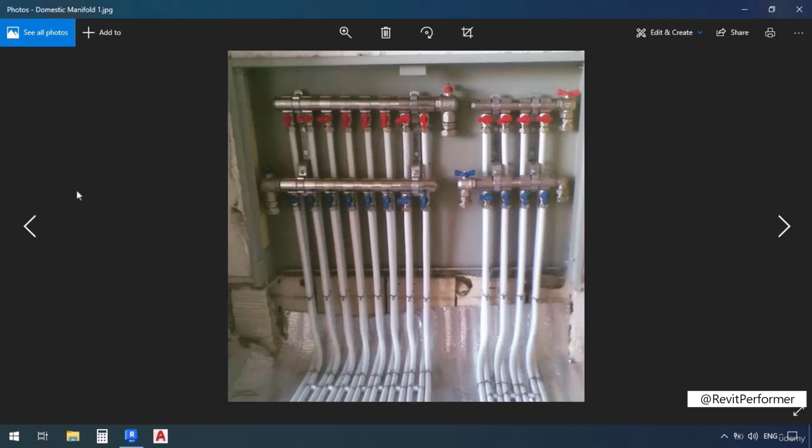We also have another system of domestic pipes, including the cold water and the hot water. Starting from the powerhouse where the cold or hot water is produced, that water goes up and leads to the collectors, and then they will be divided into branches, as many consumers as there are.

Generally, this type of collector is totally different than the collector we saw in the office project. The water comes in from the powerhouse, and then it enters the branches to feed the consumers.

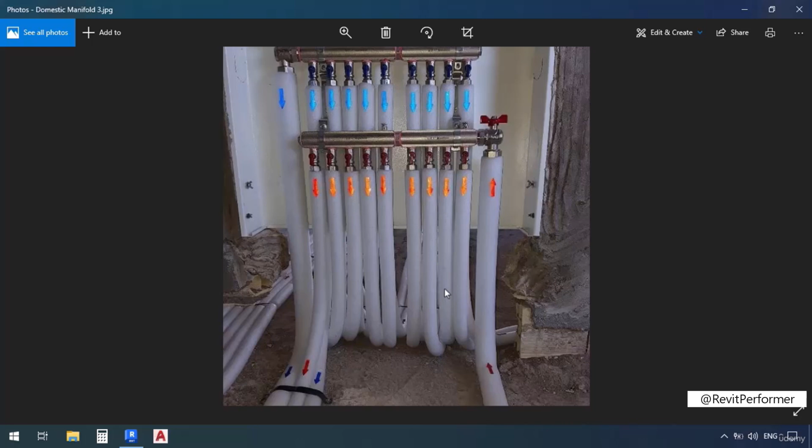Let's also take a look at this picture, another type of collector. This pipe is getting the water from the powerhouse, and each of these branches is for feeding the consumers. Also in this picture, we have another collector, and here too, we have a collector installed on the wall. This is the box holding all of this together, and what's connected to it are insulated pipes.

So now we're going to try to place a collector like this one so we can see how it works. I'm going to go over to Revit, and the project we have at hand here is for a school space, specifically for the lavatory of that school.

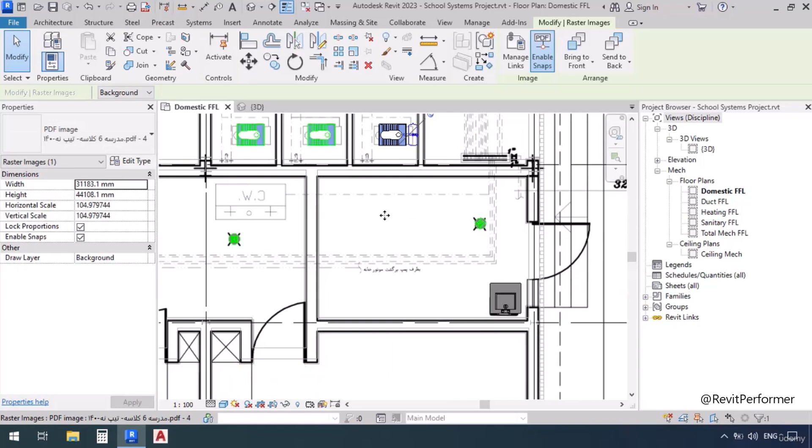First, I'm going to zoom in so you can see. This lower area is the powerhouse. From this powerhouse, two pipes go out, one for hot water and the other for cold water, and they both go to collectors. For each consumer in the area, there's an individual branch onto each of these collectors.

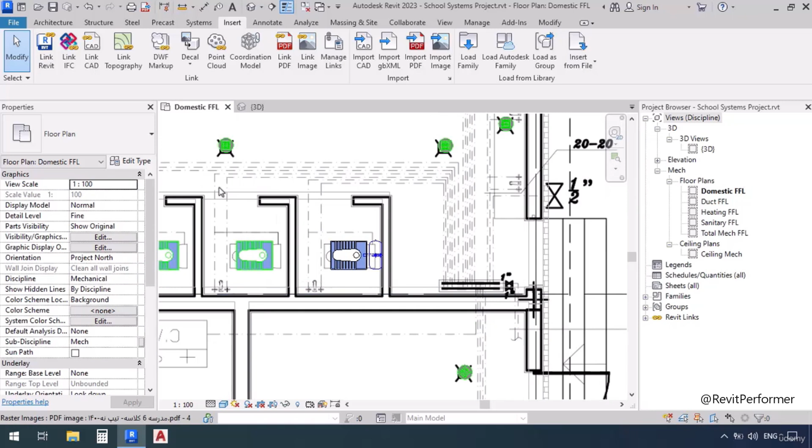For example, starting from the end of the line, this pipe is for the cold water, which goes all the way to the collector. For this other line, this pipe is coming from the collector, as well as some other lines, and we have the same thing going on here too. There's one lavatory, another, and this one, and each of these wash basins have pipes coming from the collectors.

So this is what we are trying to draw now. In order to have the best collector for this project, I'm going to go over to the BIM Object website. After that, I'm going to go to the Insert tab, then click Load Family.

Then I'm going to go to Desktop and open the manifold folder, select both of these families, and open them. Now I have to wait for them to load into my project. It also says they are being upgraded from version 2015 to 2023.

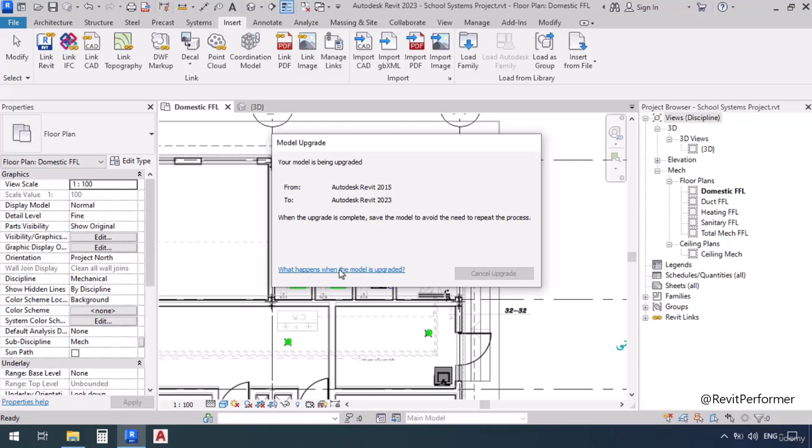Now to place them, I'm going to go over to the Systems tab, then click on Plumbing Fixture. Here I can see the last thing I've inserted and loaded, and if I click to expand it, I can see 4 different fitting types.

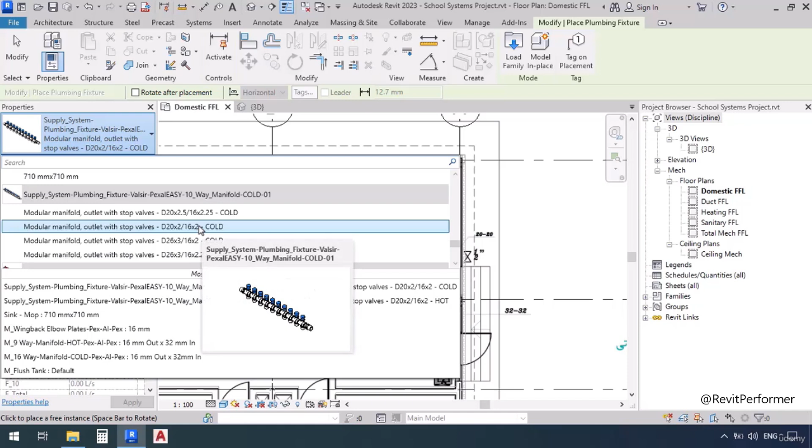The diameters of all their endpoints are 16, but as you can see, one of them says 2.25 and the other says 2, so it seems like these two differ in thickness. As for the other end, we have 20 and 26.

Now, if we go take a look at the plan, we can see that the starting end should be 1 inch, and each endpoint is 16. 1 inch means 25, so we're going to use one of these 26s, especially the one that says 16 by 2, so we'll select that one.

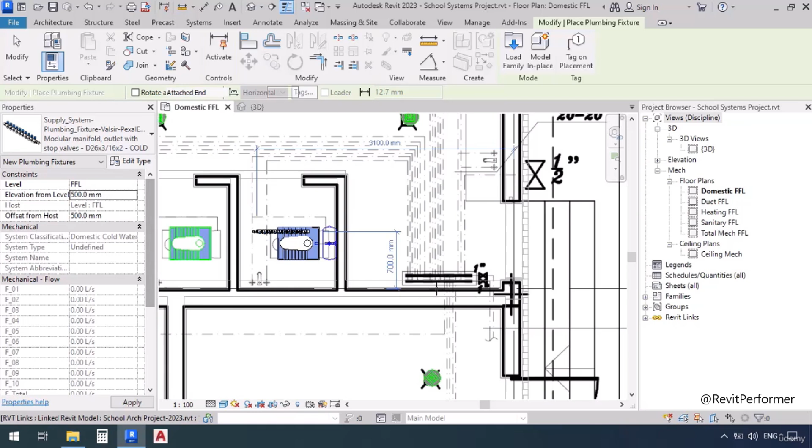Now, before I place this item, I have to give it a middle elevation. I'm going to try to place this cold water collector at elevation 500 millimeters from the level, or 50 centimeters. Now I'll hit the space bar once, twice to rotate my item and put the starting end on the right side.

Now before I click to place it, do you remember how the collectors looked in that picture? As you can see, they're on the wall in a protective box. So that means I'm going to have to place this collector in the wall. Click.

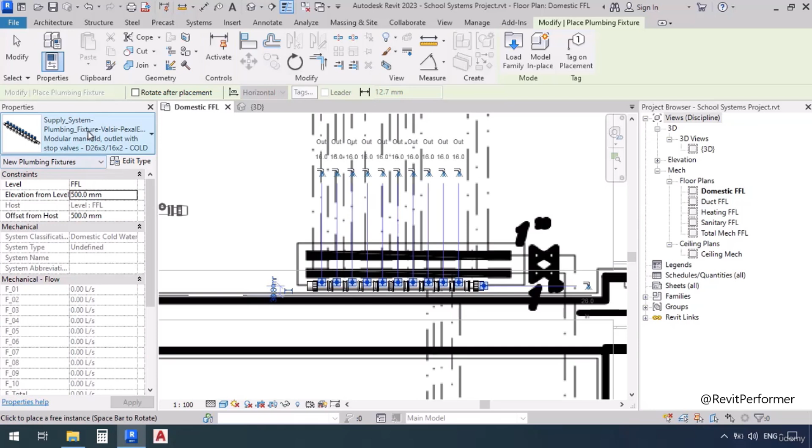Now to place the hot water collector, I have to go here and select it, the 10-way hot water one that's similar to the cold water. I'm going to select it and place this one at a lower elevation, so instead of 500, I'm going to put in 400, or 40 centimeters. Now I'm going to hit the space bar to rotate it, and make sure to maintain a distance between this one and the cold water collector. Then I'm going to click to place it.

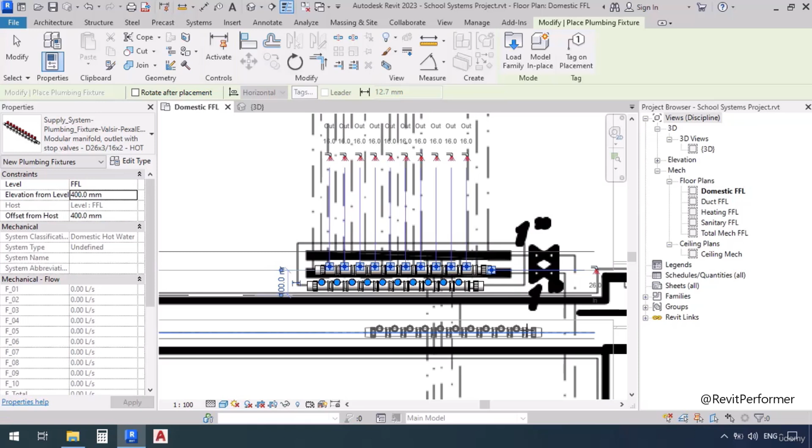Now let's draw pipes for them. First, I'm going to click on the collector to select it. Do you see this connector icon? We're going to click on it, then go over to the pipe types and select Pex-Al-Pex. Also, let's change the diameter to 16.

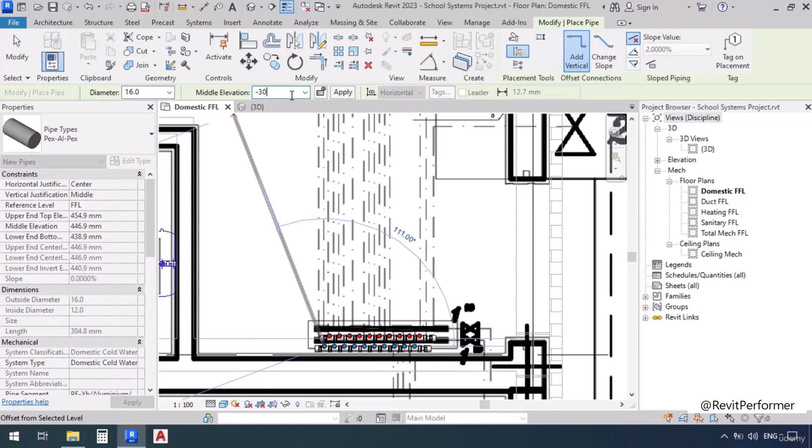For the middle elevation, since we're going to be placing these pipes in the ground, we need a negative elevation from the FFL, so for example I'm going to give it -30 millimeters below the FFL. Now I'm going to move forward and click, then go to the left and click again, then a little bit further, click, and click again at this mixer, then press escape.

Then I'm going to add a branch over here, click, click, and this pipe would be leading to the flush tank.

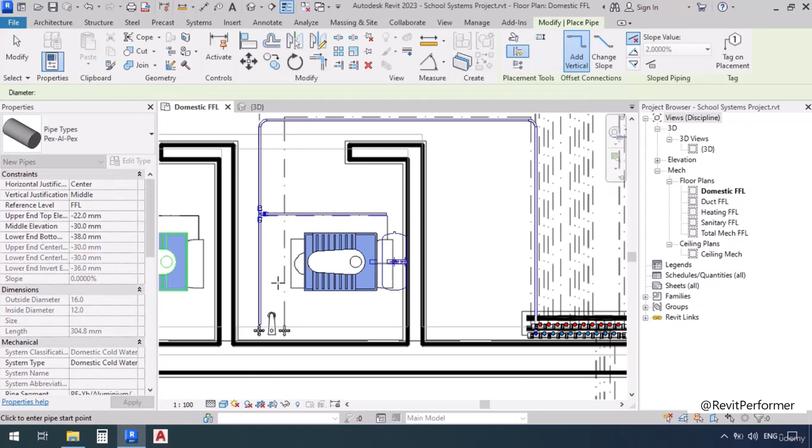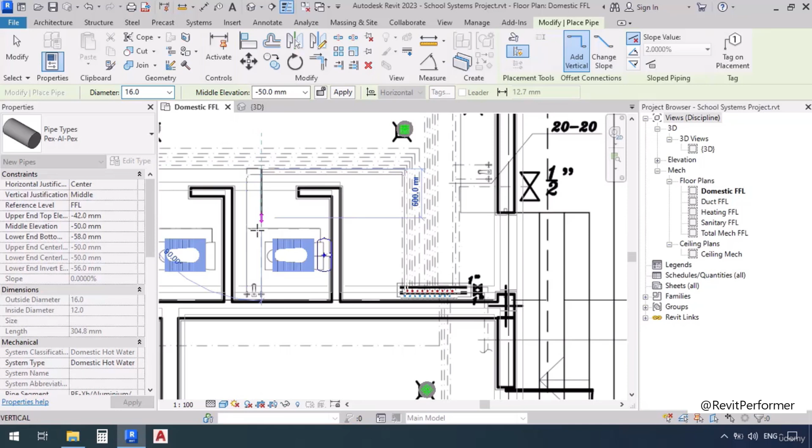This time I'm going to work with the hot water collector, and once again click on this create pipe icon, and this time change the elevations. In the previous one I drew at -30, so let's make this one -50. Then I'm going to click, move to the left and click again, and finally come down here to the mixer, click, then press escape.

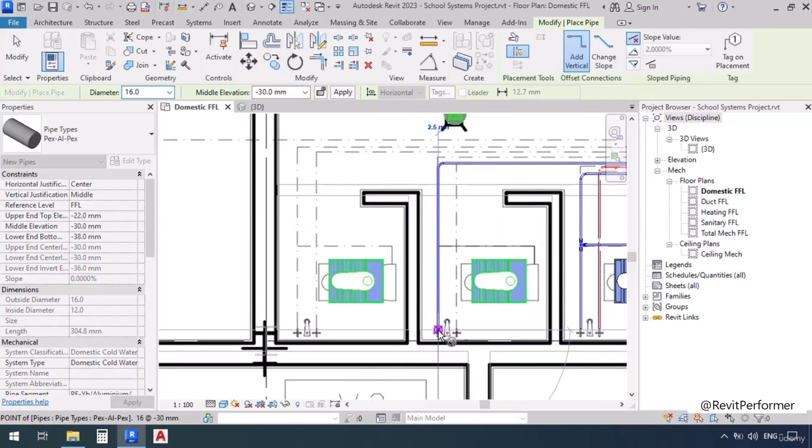Now let's go on to the next stall. I'm going to start from the cold water collector, click on create pipe, and don't forget the elevation -30 again. Then I'm going to go up here, make a click, move to the left, click again, and click down here. Now press escape, draw this branch for the flush tank, then press escape again.

This time let's go to the hot water, click on the collector, then hit create pipe. Then for the middle elevation I'm going to type in -50. Starting from here, I'm going to go up and click, then move to the left and make the second click here, then go down to the mixer, click, then press escape.

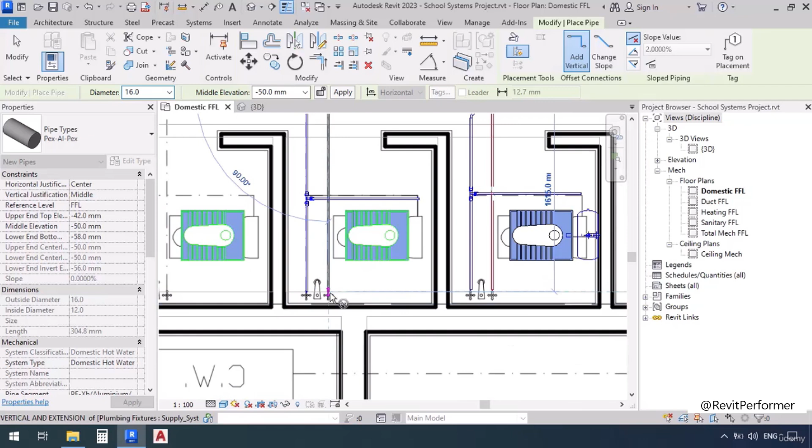So we're going to have to draw these pipes for each stall in order. What about the pipes on the opposite side? We're going to do the same thing for them as well. For example, select the collector, hit create pipe, make the middle elevation -30, and this time draw this way, go down and click, then continue towards the consumer that needs it. We would have to draw the hot water pipes the same way.

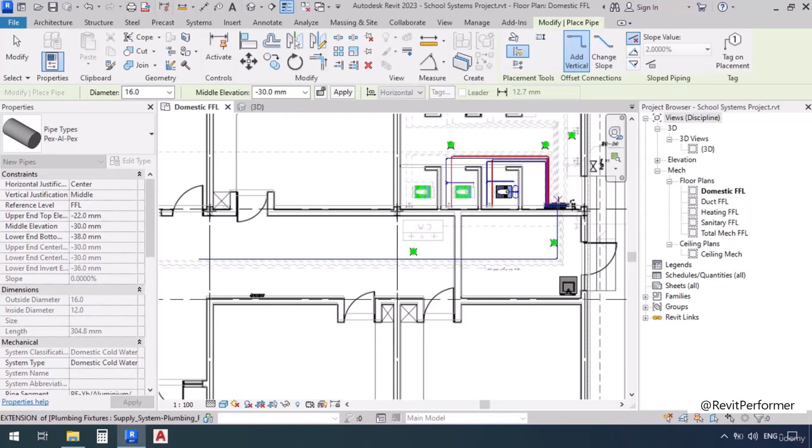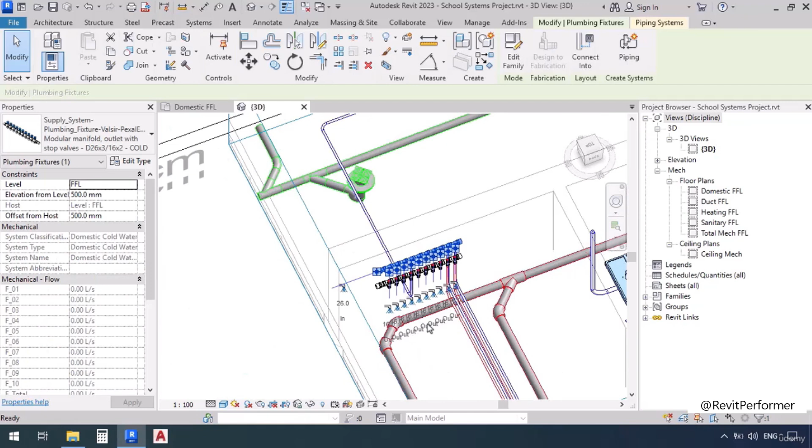But for now, I'm going to hit the tab key 1, 2, 3, 4 times, then click, hold the control key, go on the hot water pipes, hit the tab key 1, 2, 3 times, and click. Then click on selection box so we can take a look at them in 3D. Here we have the hot and cold water pipes. I'm going to rotate it so we can see from the front too.

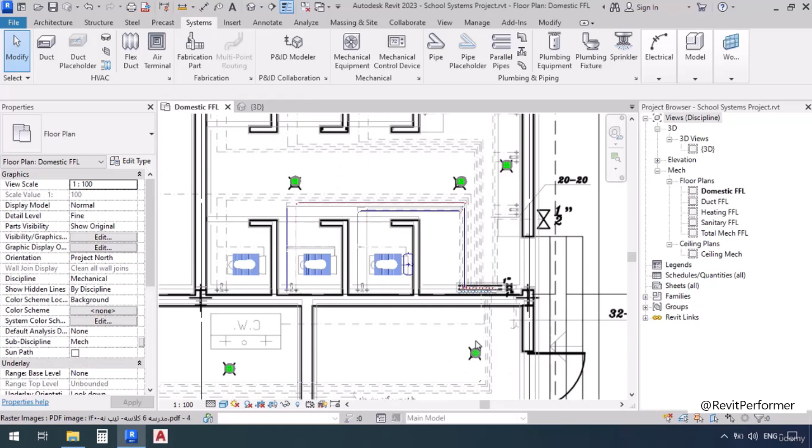Also, to draw the pipes that are coming from the powerhouse, first I'm going to click on the cold water collector, then hit create pipe, and draw a pipe a little bit further. Now I'm going to have to make it go in the ground at elevation -30, then draw a little bit further. Actually, I'm going to have to draw more so that there's enough space for an elbow. There we go.

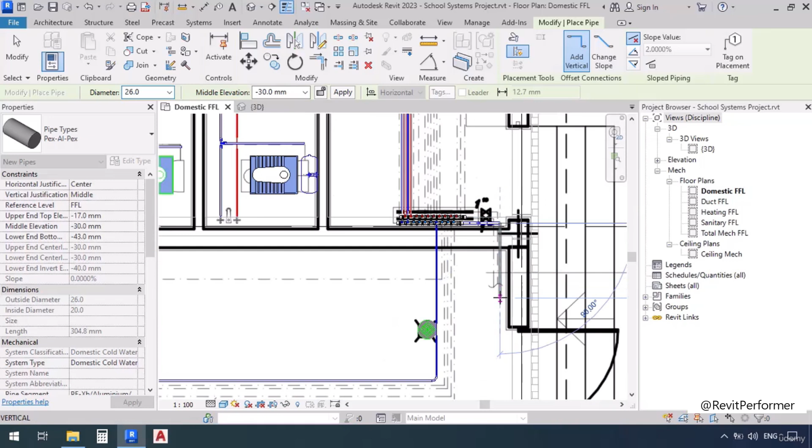And since we don't have the rest of the powerhouse, we can stop here. But first, let's go take a look in 3D. Here's the pipe. We're going to select it and move it to the right in order to save more space.

We're about to model some radiant heating pipes. First, we're going to take a look at some plans so we can figure out what is going on. I'm going to go to the projects folder, then the radiant heating project. Here we have 3 floors available. For example, I'm just going to select the first one and open it so we can check out its plan.

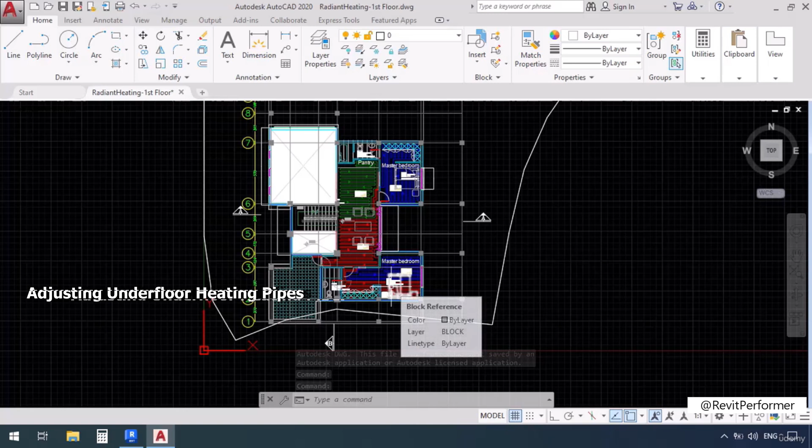Now what we have here is a 2-floor villa space, which if we look closer in its first floor, we can see this master bedroom right here. Now if we zoom in a little bit more, just like how we had collectors for our domestic pipes, we have some collectors here as well, one for supply and one for return.

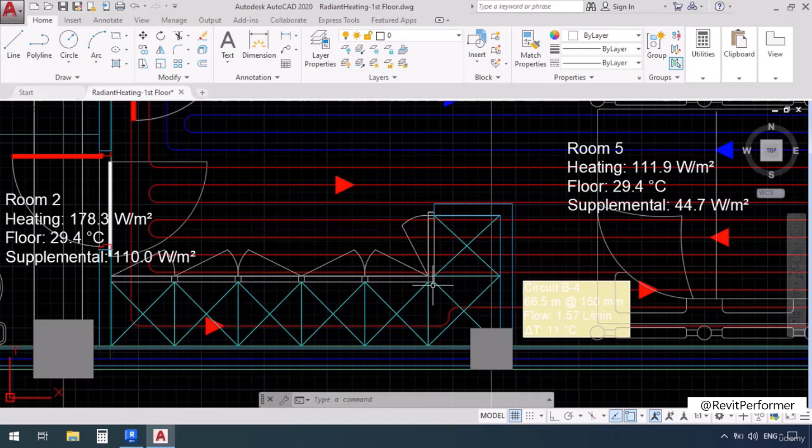This red line right here is connected to one of those collectors. The pipe is coming this way, and then it continues along this direction. And then as you can see, it keeps turning and changing directions, and eventually it reaches the return collector. Same thing with this blue zone as well, the pipes are going all the way around and then back to the collector. So for this room, we have one cold collector and a hot collector, and each of them has 2 ports.

Also, taking a look at this space, we can zoom in and here we can find the collector. There are also red and green lines. Just like the previous ones, these also keep turning around the level, then back to their collectors.

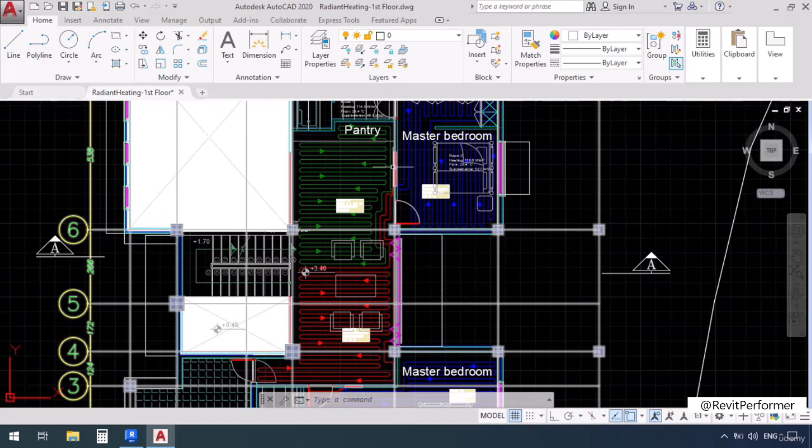And also, if we take a look up here at this bedroom, we can see that there's a line that's coming from the collector right here that turns around in the room and goes back to the collector. So this is what we're going to model.

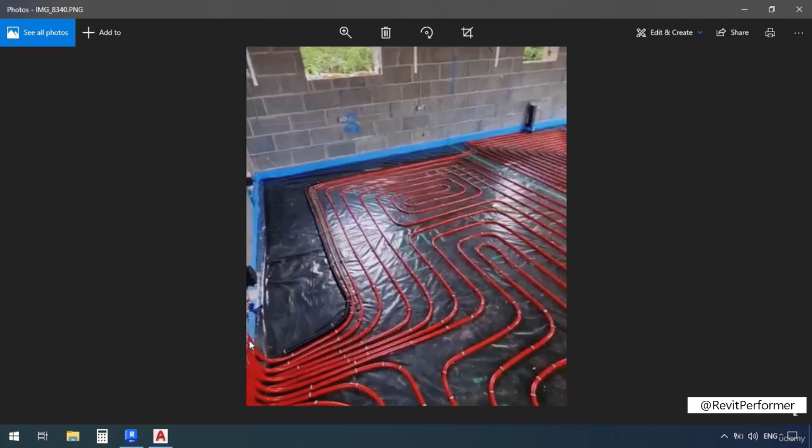Let's view the next image. This is from another angle. And in this one, if you take a look here at the left, we have this collector. We can see it in the next picture. These pipes are coming out of the collector, then cover the zones they're related to, and then come back to the collector. So let's check out this next one.

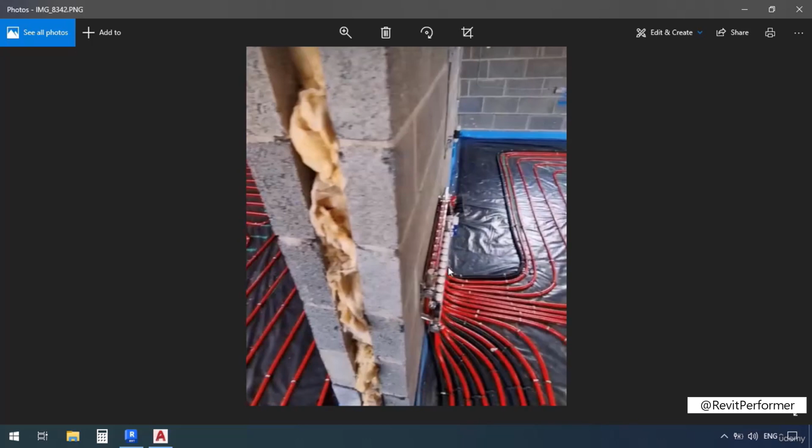Here are the supply and return collectors to which all these pipes are connected. We are about to model this. So I'm going to go over to Revit.

I'm going to select my project, going into the Radiant Heating project folder, and then select Mechanical Radiant and open it. Remember that all of the settings in this project have already been adjusted, and all you have to do is go into the right floor plan, link your plan into that one, and then adjust the settings for drawing your pipes. Now I'm going to go over here to the project browser window under Discipline Radiant Heating, and then I'm going to open my first floor plan.

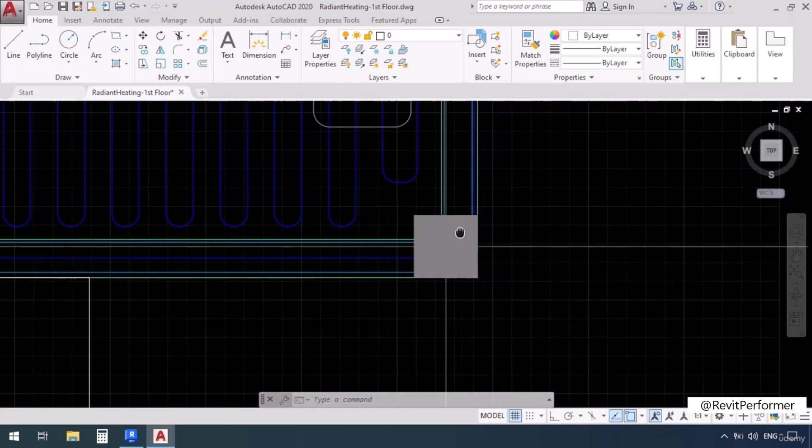I'm going to link my plan into here, but first I'm going to have to check what the unit of that plan is. So I'm going to go over here and, for example, measure the width of a column. I'm going to click here and here, then somewhere blank. Now we're going to check the number, and here's what we've got, 41 something. So I'll figure that this is probably 41 centimeters, but also I'm going to double check in dimension style. Let's click on modify. And then in the primary units, I can see that the scale factor is 1.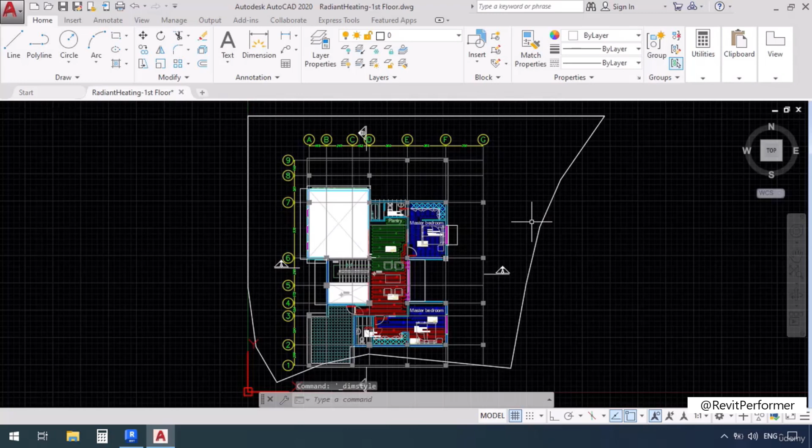All right, so I'm going to link this plan into my project with the unit centimeter. So I'm going to Revit, Insert tab, then click Link CAD, and then I'm going to select my plan. Check Current View Only, Import Unit Centimeter, Positioning Center to Center, then click Open. Now we have to wait for the plan to load.

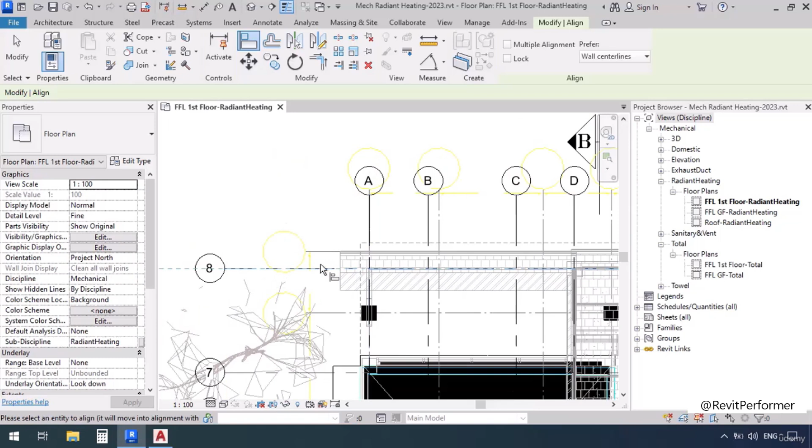Now, in order to place the plan in the right position, we're going to be using align AL, grid A with A, and on this side, 8 with 8. Okay, now, if we take an overall look at the plan, it seems like the imported units are not compatible with our project. That's probably because the plan was not scaled, so we're going to go scale it.

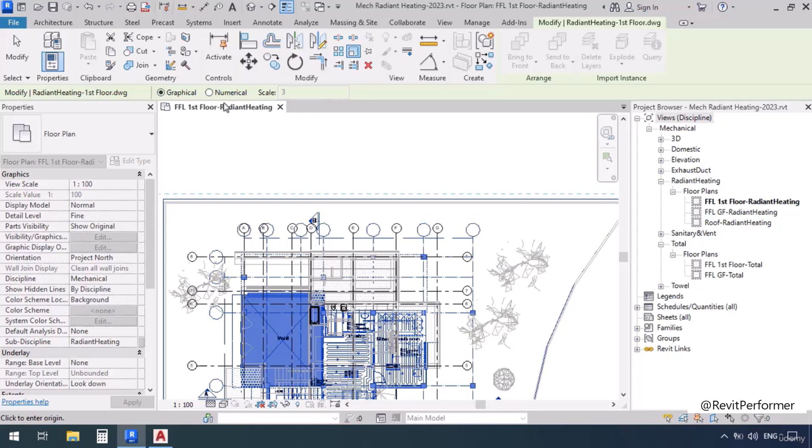First, I'm going to select the plan. Let's make it selectable. Then select it, and then go up to the Modify tab, find the scale command and click on it. I'm going to want to scale this plan right here graphically because I don't have any scale factor numbers to scale it with. So then I'm going to zoom in on here, and then I'm going to say that I want the distance between A and B from the plan to be the same as the distance here.

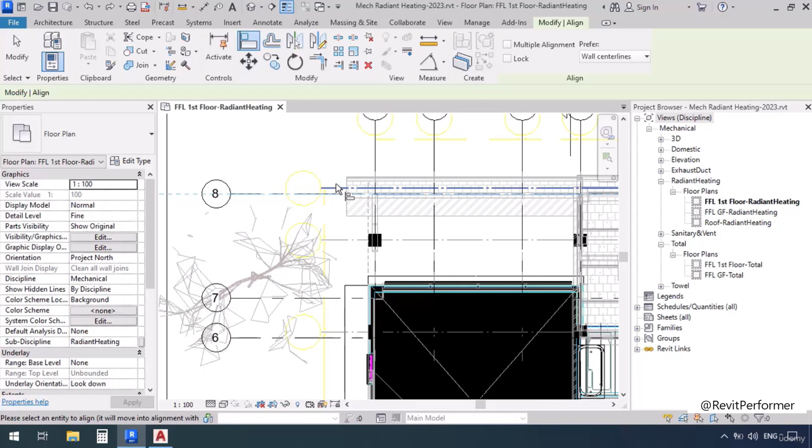The reference stays where it is, so we're going to click on here to make it the same distance as the other. Now we've scaled the plan at that axis, and now for the horizontal axis, it's just enough that we align them AL, then align grid 8 with this grid 8, and that way all the other grids have fallen into the right place.

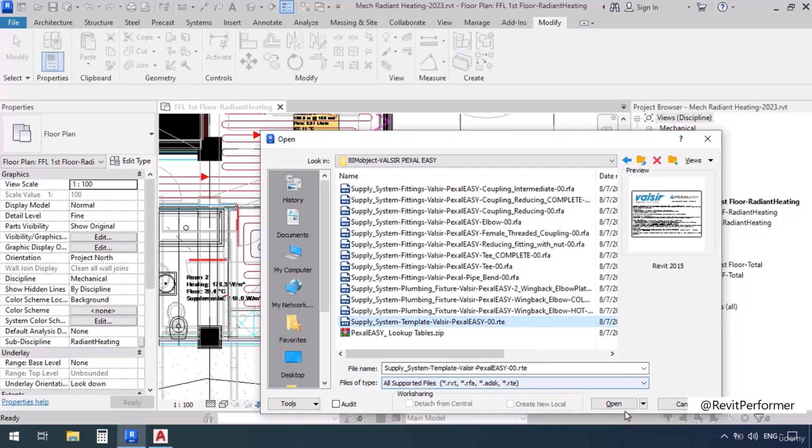Now I'm going to go over here and I want to start drawing my radiant heating pipes from the pipe type Pexal 5 layer. Just the same thing we used for the domestic pipes. So first I'm going to have to open its template and then transfer its information into my project here. I'm going to click open, then go to where I've downloaded my template, which would be this folder. Select the template and open it. And now I have to wait for it to upgrade from version 2015 to 2023.

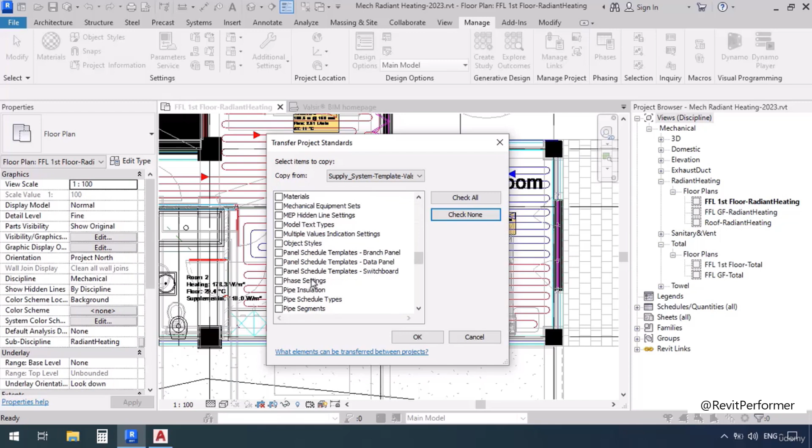Once the template opens, I'm going to go back to my own project, then to the Manage tab, and then click on Transfer Project Standards. Here it says Copy From, where we need to enter the plan we're copying from, and here I can also see the plans that I've linked into my project. So I'm going to open the drawer, then select this template. Now here in the list, I have to specify what I need to copy, but first I'm going to hit Check None to deselect all of them. Now I'm going to scroll down to find pipe types and check it, and then click OK.

You might also come across this message in regards to the materials that are being transferred, saying that some of them already exist. So just click OK. And then another window could pop up also about the materials. And then here I'm going to click New Only so that only the new ones would be transferred.

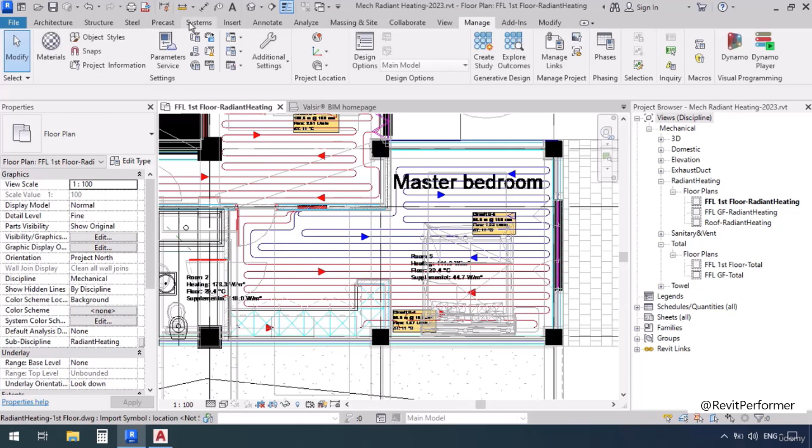Now to begin drawing, I'm going to go over to the Systems tab, then click on the Pipe command, and then I'm going to go over to the Properties window to select my fitting type, which would be PEX Standard. Now for the system type, I'm going to go over to the Project Browser window, open the Families, and then Piping Systems. And now here I could just duplicate this hydronic supply system type, so I could use the duplicated one as the system type for these radiant heating pipes. So I'm going to right click on it and click duplicate.

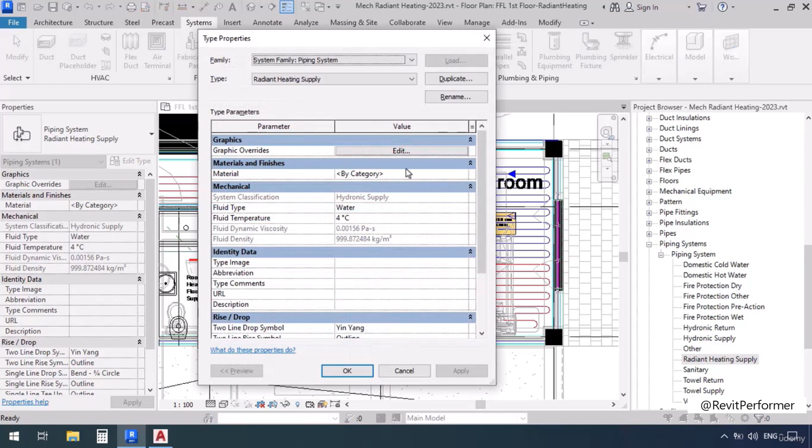Then I'm going to rename this duplicated one to radiant heating supply. Then press enter again. Then in front of graphic overrides, click edit and select a color for these pipes, for example, orange. Click OK, OK, and OK. Now go to Systems, Pipe Command, and now here we've already selected PEX. And now for the system type, we're going to select Radiant Heating Supply.

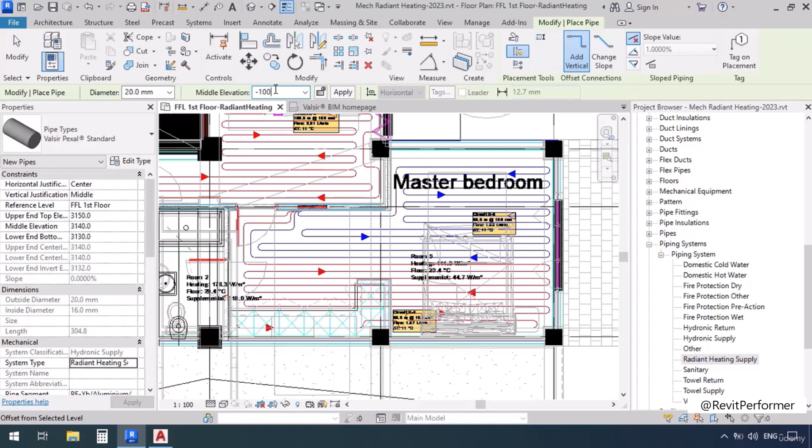As for the diameter, we're going to put in 20 millimeters or 3/4 of an inch. And for the middle elevation, we're going to want it to be negative from the FFL. In other words, we want to place the pipe into the ground. So I'm going to go over here and enter -100 or 10 centimeters below the finished floor.

Now I'm going to go over here and start drawing. Make the first click, go a little further, make the second click, then according to the plan, come all the way down here, make the next click, then move to the right, make the fourth click, up here the fifth click.

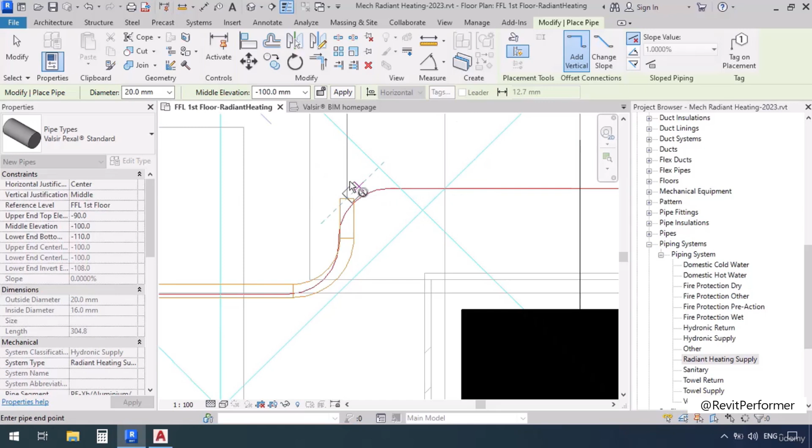But if I try to move forward from here, the radius is too small to get an elbow. So I have to go further up and then move to the right. I'm going to press escape and then set the display on shaded so we can see better. And now we're going to try to see how low this elbow can go. We're going to move it lower.

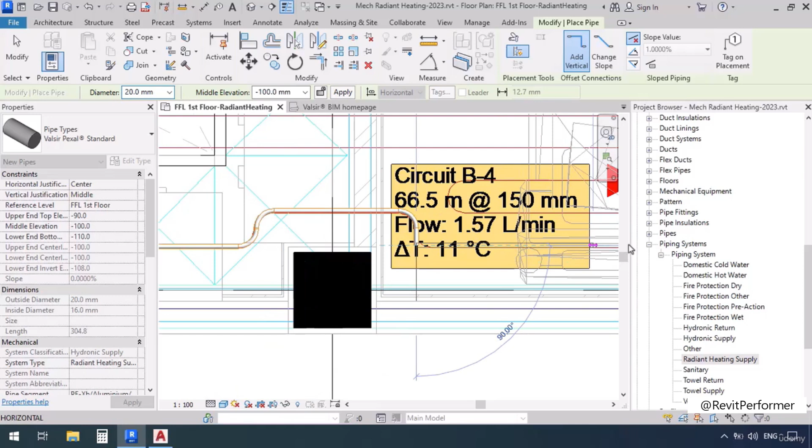This is as far as it goes, and even though this is not exactly how the plan intended, that's all right. We're going to continue, right-click, draw pipe, then move forward to here, then move down, click, and again, it doesn't go to the right, so we have to make this longer, and now we can turn to the right. We're going to go all the way here and click, go up and click again, then move to the left

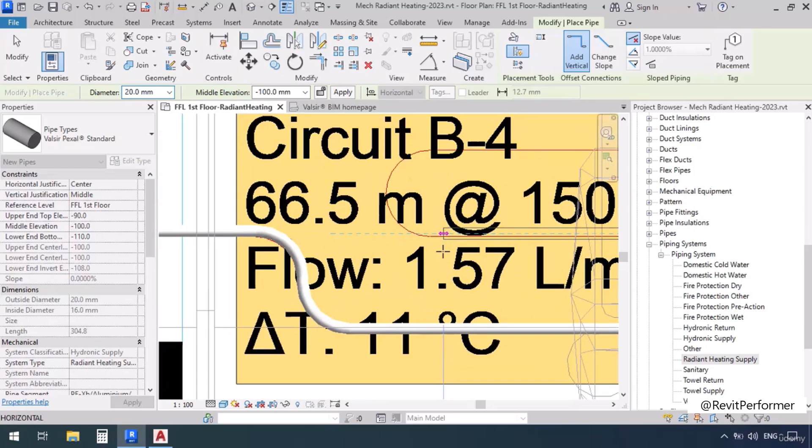and click here. Now I'm going to press escape, then try to move up this pipe as far as it goes. So let's go on. Right click and draw pipe. And then I'm going to zoom in on here, click at this point, then move up and to the right. But the radius is too short, so we're going to make this one a little longer. Then we're going to turn to the right, click, go upwards, move to the left, and let's pause here.

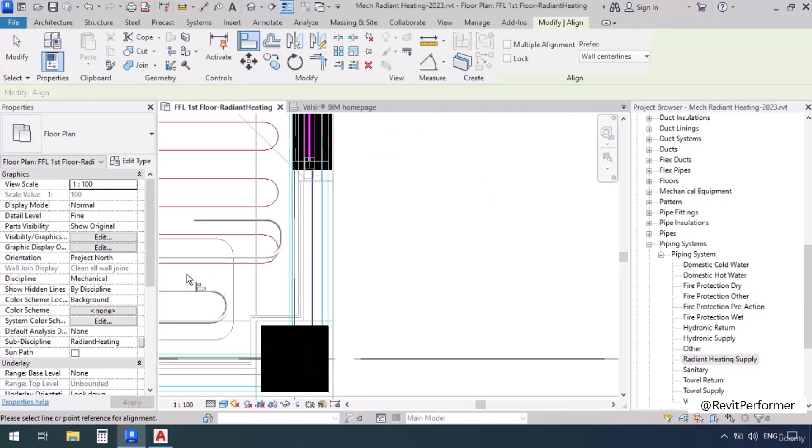Let's align the pipes AL, this one with this line. But then we get an error in regards to these two elbows. Do you see how they are going into one another? So that alignment can't happen here, but we're going to do it anyway, and we're going to make it delete the extra fittings. But then if we try to align these, do you see that error again? The thing is that this radius for a pipe of the Pexal type with diameter 20 is in reality way bigger than what we can see in the plan here.

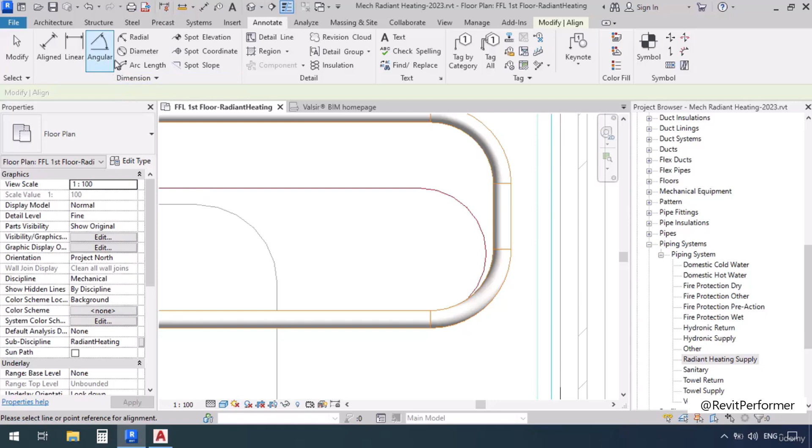So let's hit cancel and then measure the plan. I'm going to go to the Annotate tab and then click on Radial. Then I'm going to measure the radius of this drawing in the plan. So it seems like the radius here is 75, whereas the radius of this elbow that we've drawn, if we go take a look at it in the Properties window, we can find its number right in front of this parameter. The parameters are in Italian since the brand we're using is Italian. So it says 3.15 inches.

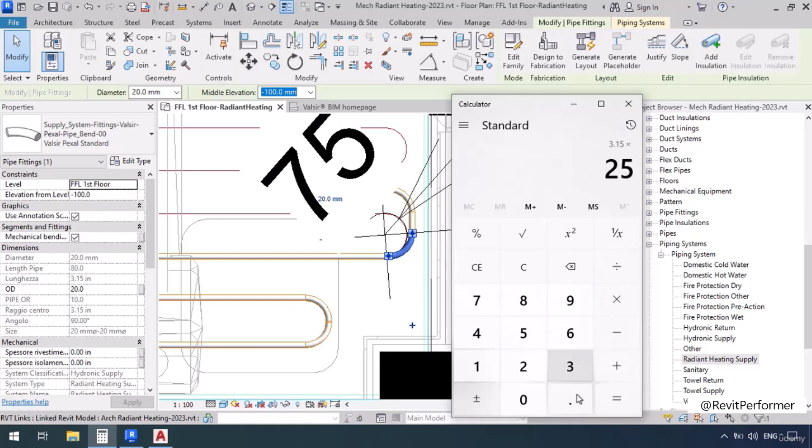I'll open my calculator and multiply 3.15 by 25.4, then we get 80.01, and we'll round it to 80. So on one hand, the radius of our elbow is larger than the radius of the drawing, and on the other hand, the radius is not editable here. We'll even go to Edit Type, and once again, here we don't find any parameters in regards to the radius, so we could change it.

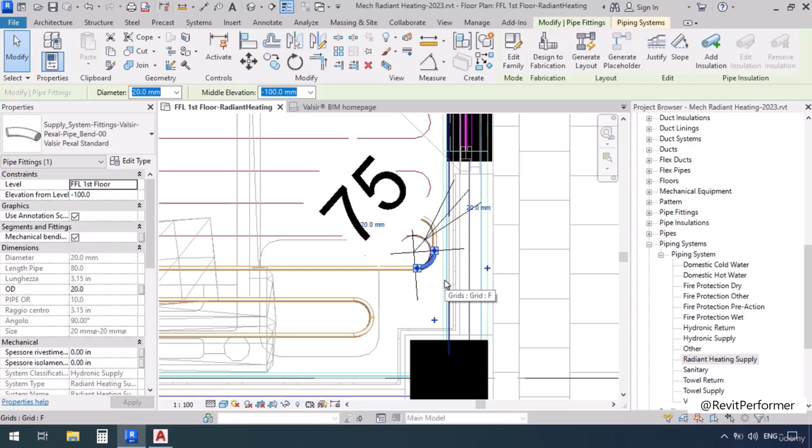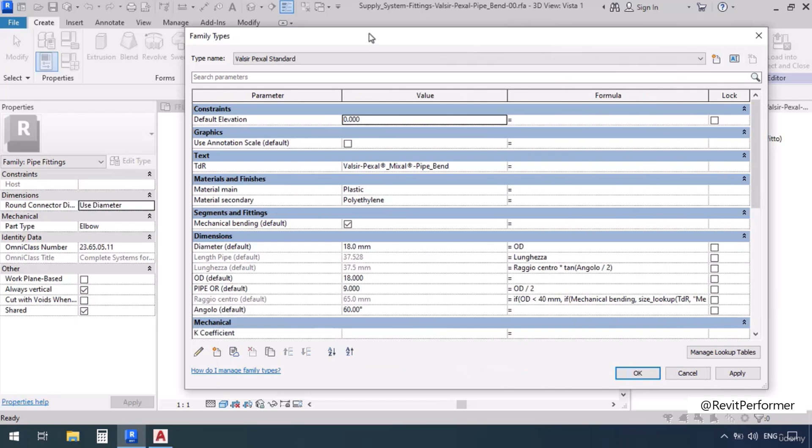So what I'm going to do is I'm going to go to the family space and make some changes to the elbow family itself. So first, I'm going to select the elbow, and then I'm going to click Edit Family so I can go in the family space. And then here, I'm going to open the Family Types window, and then I'm going to look for the radius parameter, which would be this one. By taking a look, I can notice that there's a formula written for it. I'm going to also expand the window so we can see all of it.

There we go. Our formula starts with the word if, so it's a conditional one. And then a little bit further, it says size lookup. There's actually this concept or term in regards to modeling fittings called a lookup table. A lookup table is in fact an Excel file which has been organized specifically based on some things, and then that table would be introduced to Revit, and then we could adjust in a way that we can make the radius follow the rules that are mentioned in that lookup table.

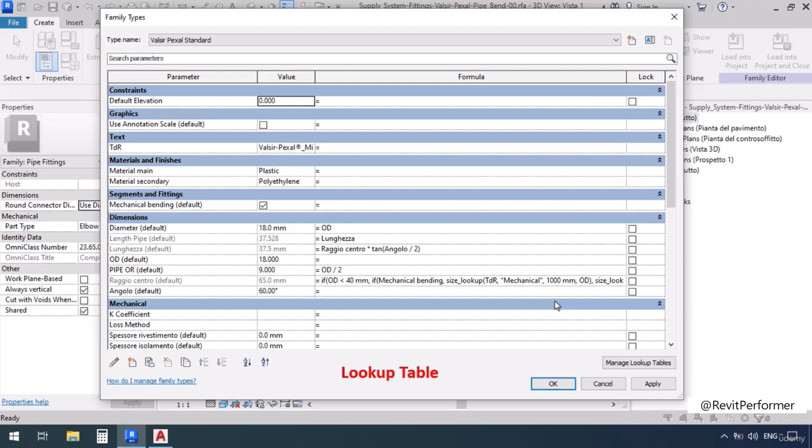That way the parameter in Revit would not be allowed to follow or enter any other numbers than what has been mentioned in that table. You already know that your pipes could have so many different sizes and diameters, but not all of them have been produced. So based on all of that, this formula basically says that it needs to follow the rules that are mentioned in the table called TDR.

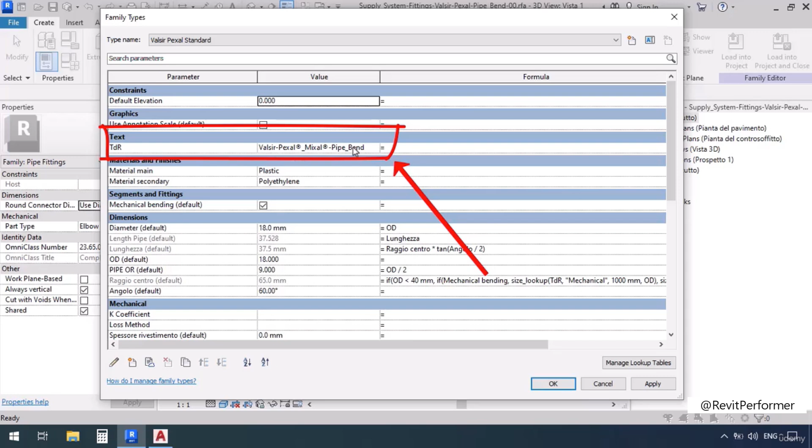And also up here, we can see this parameter called TDR with this value in front of it. Let me expand further so you can see it too. Now you see it says Valsir, Pexal, Mixal, Pipe, Bend. We're going to check it out later. So from this TDR lookup table, the mechanical parameters should be followed.

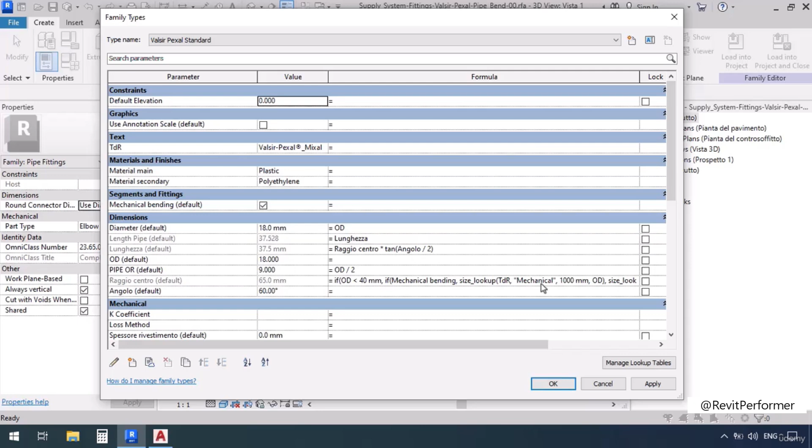And now these mechanical parameters should be used by what value? It should be the same as the number or primary value that's been given to the OD. So that means if we have a value for the OD, the mechanical parameters should also follow that one. But remember, if you haven't given any value to your OD here in this list, you could make up for it by giving it the number 1000. Let's expand the window a little bit more.

This formula is conditional and includes some other items. Then it also says from the lookup TDR, the mechanical parameters should be used by the same value that was primarily given to the OD. If there were no values, you could put 1000. And then it also says use the manual parameter, same as the primary value of the OD, if not 1000. But now we've got to figure out what this if means. What is the condition here?

Generally, we could say that this if means that if the condition that is given is true, Revit would apply the first condition, but if that condition was false, then the second condition would be applied. Now we've got to see what this mechanical bending means. So let's take a look over here and find mechanical bending. You see it is checked.

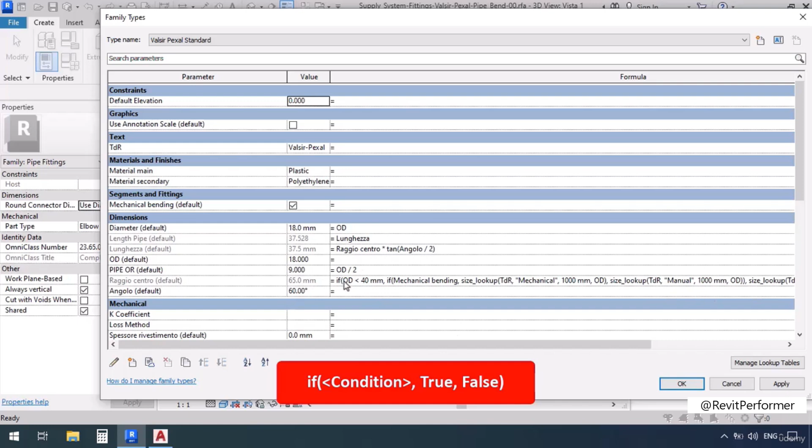So if the mechanical bending was on, then these mechanical parameters would be used. But on the other hand, if it were unchecked, then the second condition would be applied. So if the condition is true, then the first one applies, and if it's false, then the second one does. So that's it about the if part. But there's also another condition. If the OD is smaller than 40 millimeters, then the first if would be applied, and if not, the second if would. So this is just a bunch of complex conditions, but this is not my point right now.

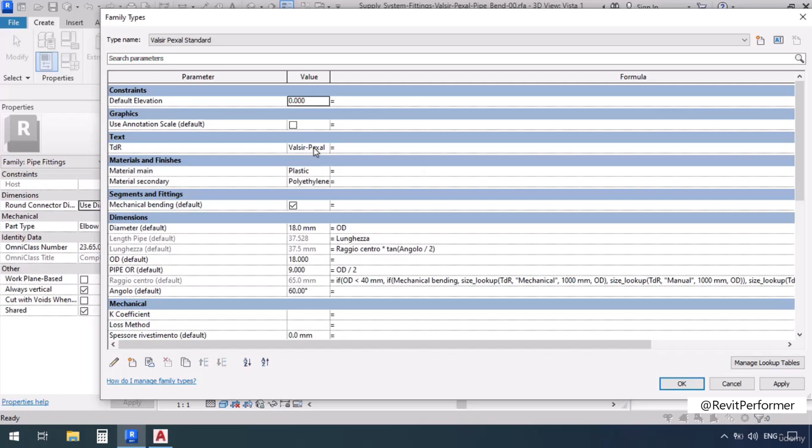What I'm mostly focused on is this lookup table. Like I said, the lookup table is an Excel file in which some parameters are defined, and we could make Revit read the parameters from that Excel file. So now let's go see where we can find this TdR Excel file with this value. At the bottom right of the window, we can see this button, Manage Lookup Tables, so we're going to click on it. And as you can see, once we open the window, we can see the same name here, Valsir, Pexal, Mixal, Pipe, Bend.

So first I'm going to export it. Export it where? I'm just going to put it on the desktop. Click Save, Cancel, Cancel. And now I'm going to head over to my desktop so I can open the Excel file. So like I said, we have some parameters over here with these specific values. Let me expand the columns.

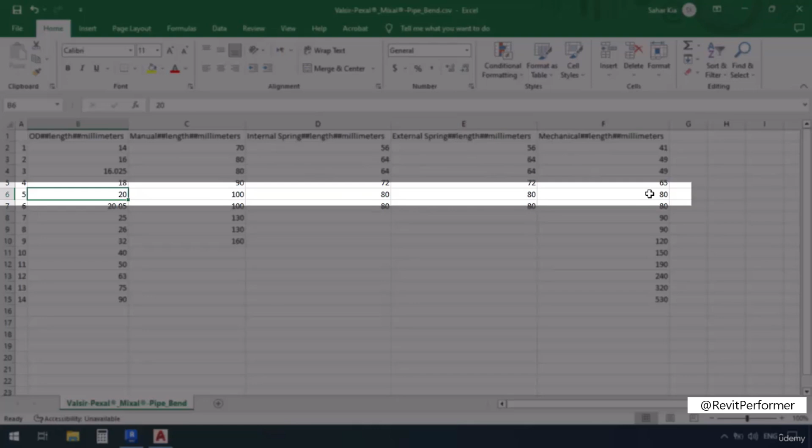And for example, we have this parameter OD here from the type length, and in the unit millimeters is 14. We also have this manual parameter from the type length in millimeters. We also have this internal spring parameter, length by millimeter, as well as external and mechanical. So that's all the parameters we have here. Now, what's the size we were dealing with? It was 20. So its manual parameter would be 100, and the internal spring, external spring, and its mechanical spring are all 80. Now, the parameter related to the radius is following the same thing as this mechanical.

So I could just use this value for my pipe, which is 20, or I could use a smaller number. When I measured in the plan, I got 75, but since Revit doesn't allow us to connect a fitting to another one, we're just going to be using a smaller radius so that we would be able to put a small pipe in between the two fittings. So I'm going to change this 80 to 70. In the plan, I had 75, but I'm going to change this to 70.

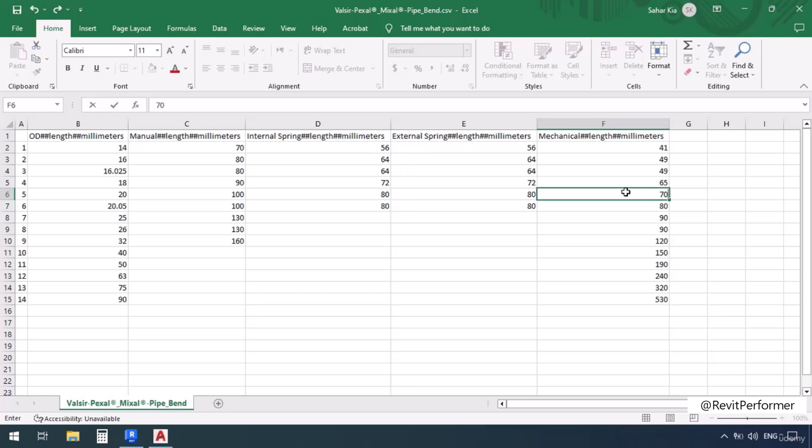Then I'm going to save it by Control S. Then I'm going to close it and then go back to Revit. I'm going to open the Family Types window again.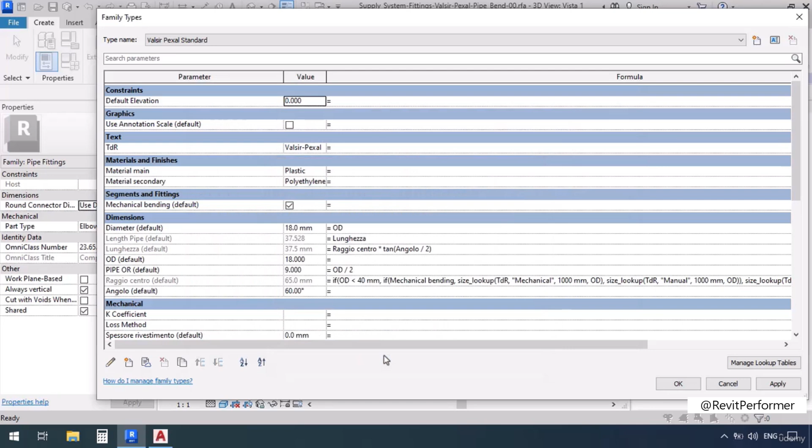Then I'm going to click Manage Lookup Tables. Then I'm going to delete this file, hit Delete. And then we get a message saying that this lookup table is the reference for some parameters. Are you sure about this? Delete anyway. Now we're going to import again, then select this edited Excel file, then open it. Then click OK. And now the reference for some of the parameters is this changed file.

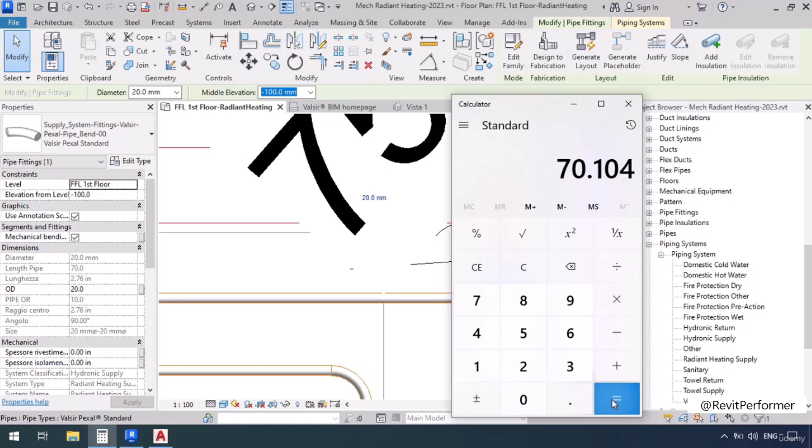Click OK. And now we're going to load it into project. Load into which project? This mechanical radiant heating. Click OK. Then overwrite. And now do you notice how the radius of this elbow got smaller? If I click on it now, I can see its radius is now 2.76 inches. Let's multiply to double check. 2.76 multiplied by 25.4 equals 70 point something, and we're going to round it to 70.

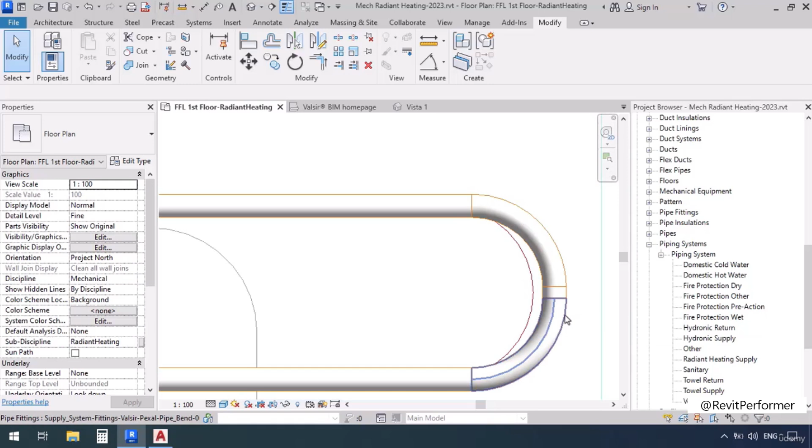Now we can very easily align our drawing with the plan. Let's delete this number, then hit AL, click, click. There's also this very small space between them. Like I said, we are not allowed to connect two fittings in Revit. So that's why I chose to put a smaller radius than the actual one, so we can have this part between them. Now I'm going to select this elbow and move it to the left so that it's exactly aligned with the plan.

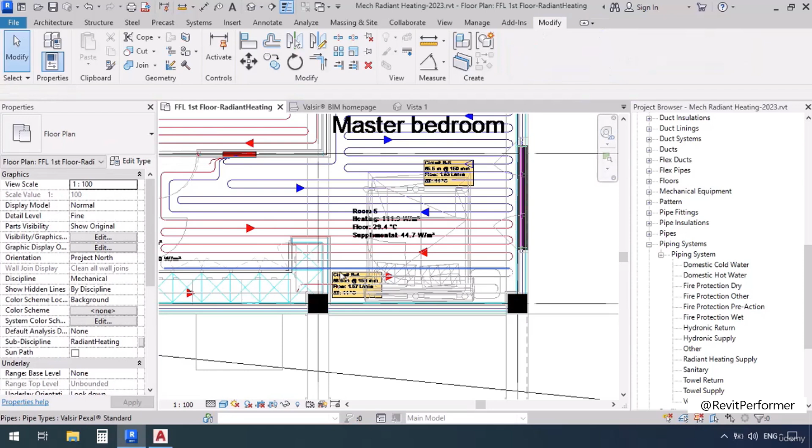Now to continue, we're going to right-click and draw pipe. Then I'm going to go all the way to the end of the line. Click here, go up and click again. And let's also make it a little longer. And now we can easily turn to the right because we're going to be getting the elbow. I'm going to go to here, click, then press Escape. Now let's align our drawing. We're going to make it more precise. I'm going to take this and move it up. And then hit AL to align this with this.

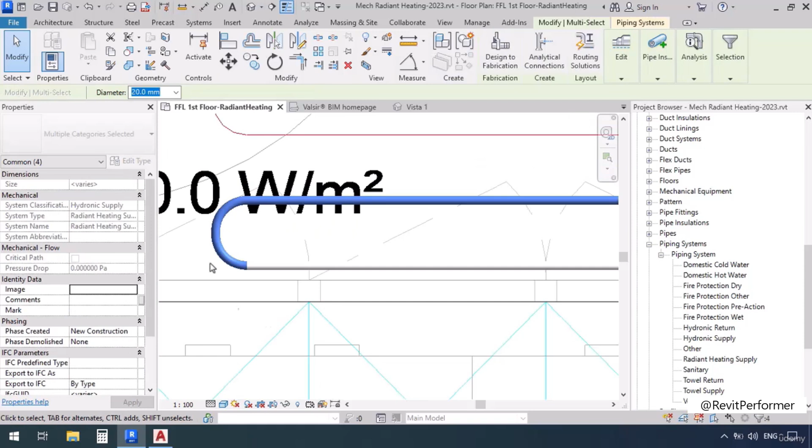Now before I continue drawing the rest of it, as you can see, most of them are very similar. So instead of drawing the rest of the pipes one by one, I could just use the Array command or just copy them. I'm going to select this pipe, hold the Control key, select this elbow, select this pipe, and this elbow, this pipe as well. And then here, select this elbow and this pipe. Now I'm going to copy them, click copy, or I could just use the Array command.

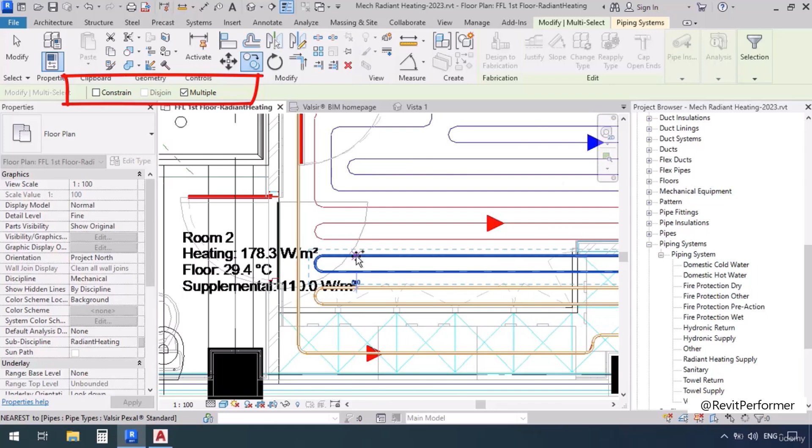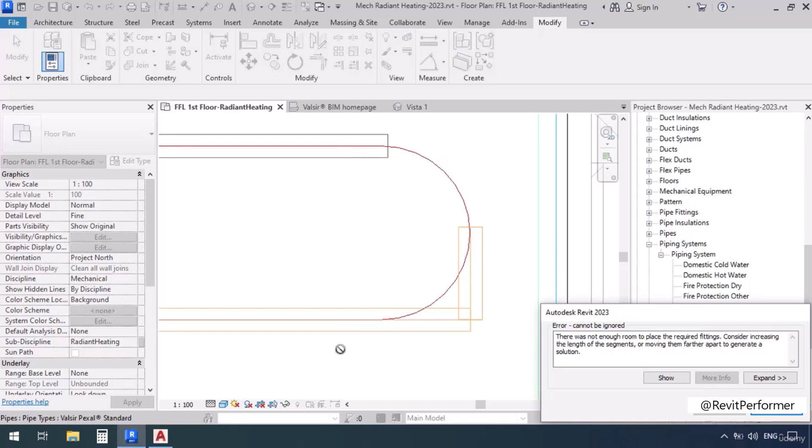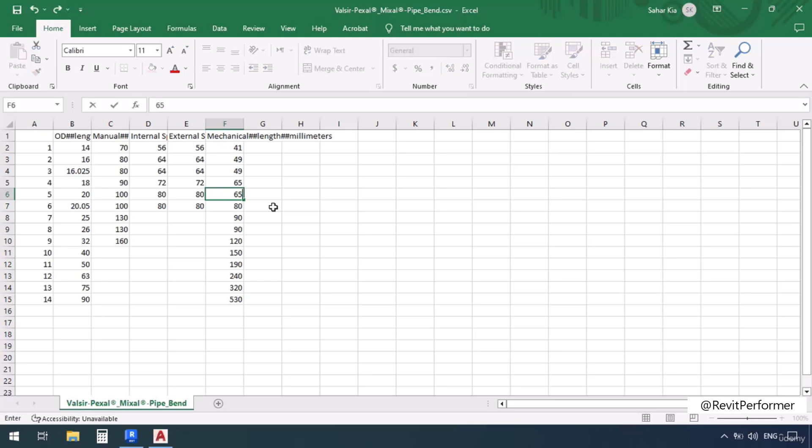So once again, I'm going to figure that because of the radius of this elbow and the short length of this pipe over here, this connection can't happen so easily. So once again, the best option would be changing the radius of this whole family. Therefore, we're going to open that Excel file again. And then here we're going to change this number 70 to something even smaller. For example, 65, Control S to save it. Now let's head back to Revit.

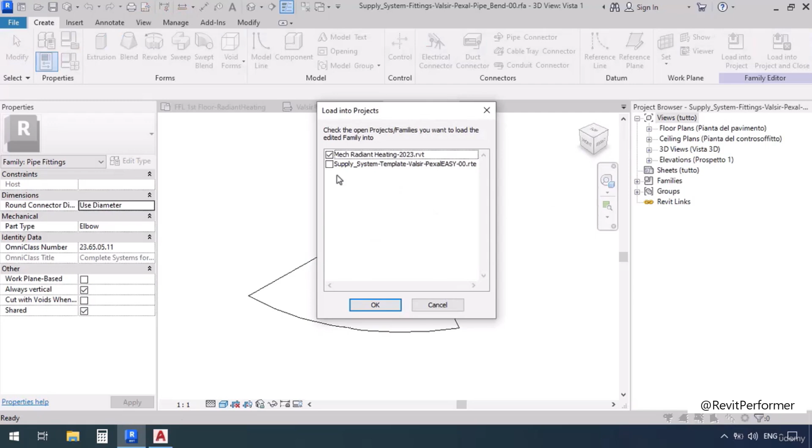Go over here to the family space, then click on Family Types, and then Manage Lookup Tables, and then delete this file, delete anyway. And then we're going to re-import the table, select this new Excel file, open, then click OK and OK. Now we're going to load this into project. In Mech Radiant Heating, click OK and overwrite it. Now that our radius got smaller, we're going to use trim again, TR, connect this to this. Now they can be connected easily.

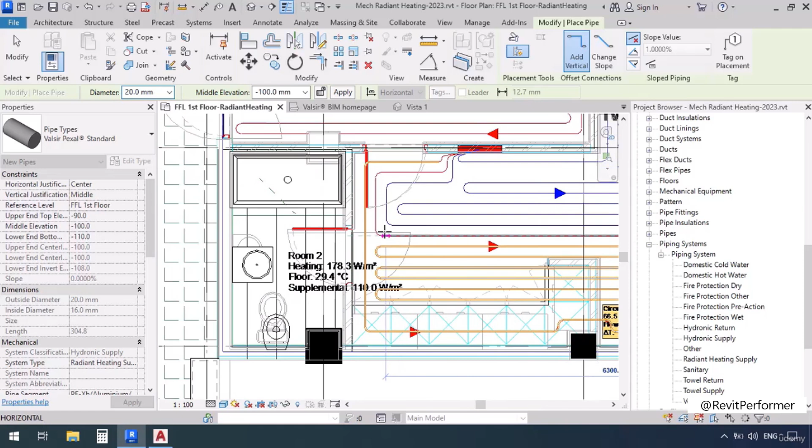Now we're going to go up here and we have to draw the rest of the path. So right click and draw pipe, go a little further, and then move upwards, click here. And then I'm going to turn all the way to the left, click, and then I'm going to move upwards, click again, then turn to the right and click here. And now the next thing we should do is place the connector so we could connect these pipes to them.